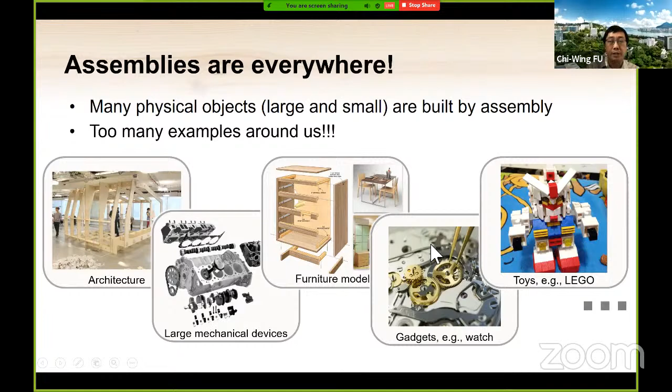So the question is, what is the general procedure to create a design? Basically, if you want to create a design of a 3D object, first of all, you have some ideas. You may need to do some sketching on paper or using a computer. Then you may want to create some virtual model to preview how it looks, and you may also use a computer to do some simulation. And then we will create a physical prototype or even the final fabrication. So that's the general design pipeline for creating objects.

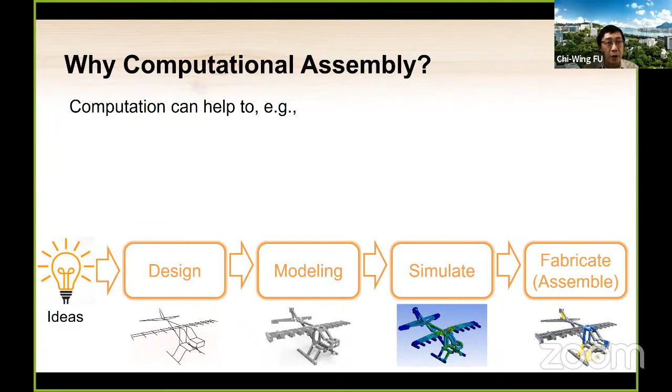But why do we want to do computational assembly, or how can computation help to create this kind of assembly in general? Basically, I can summarize how computation can help us in several ways. First of all, we can use computation to help us reduce the manual workload in the design process as well as the modeling process.

Just a simple example with Lego. If you use some Lego design tools or something like a CAD tool, we can quickly create some models with just drag and drop using the interface. And there is also no constraint on what type of brick, whether you physically have those bricks or not. You can create it virtually, for free. And the other thing is that after we have a model, we can also perform some kind of simulation. For example, we can simulate the motion, simulate the stress, and also evaluate the stability.

And more than that, we can also do assembly planning. After we have an assembly created virtually, can we use the computer to do some computation to help us design the procedure to assemble the objects, part by part? And also we can use a computational algorithm to help us generate the instructions for the assembly.

And more than that, when you have a computer, more than just those CAD tools that I have shown you, after you have created objects or some prototype, or after you perform some kind of simulation, you can also use the result of this stage to go back to the design and use some computational methods to try to optimize the design, subject to some physical constraint or fabrication constraint. I think Ziqi, in the second part of today's deep dive, will talk more about this.

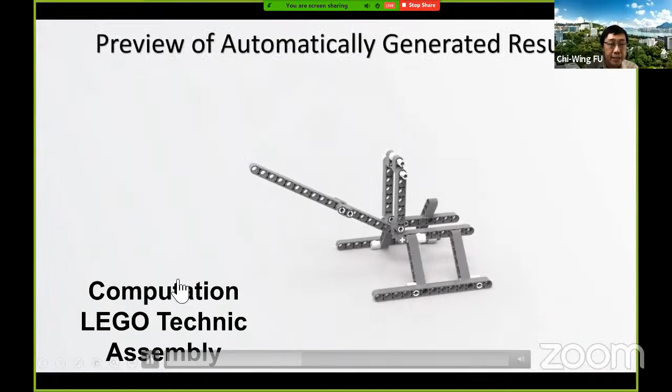Particularly my recent project on how to use a computer or algorithm to create a design. The input to our method is just some user sketch, as you can see here. Let me go back a little bit. Given a user sketch, where the user just needs to sketch in a virtual environment, a 3D world, our goal is to create an assembly, as you can see here. The assembly should be faithful to the input sketches, and we also have to consider the structural integrity, as well as aim for some simplicity in the design.

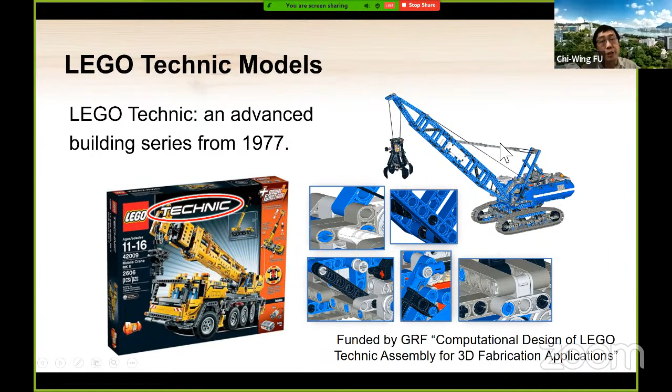So how can this be done? Before we look at how this is done, let's look at some background information about Lego Technic, which is the goal of this example project. In this project, our goal is to create a Lego Technic assembly. Lego Technic actually has quite a long history, more than 40 years already. This kind of assembly is mostly for frame structures, some mechanical structures, as you can see here.

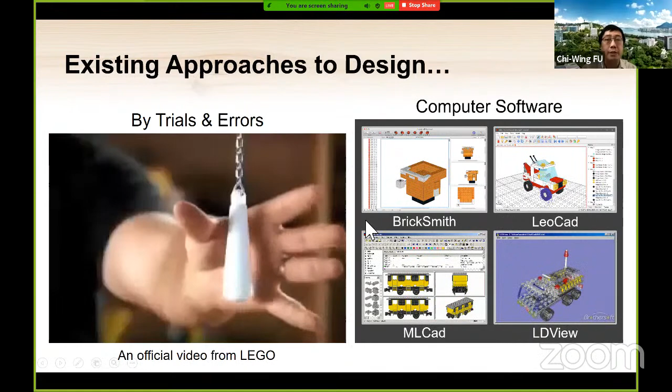For existing approaches to design this kind of assembly structure, basically there are two. One is trial and error. As you can see in this video, the designer can directly and manually construct the design, but this always involves a tedious trial and error process. How about using those CAD tools I just mentioned? Using those CAD tools, people usually create a design by means of drag and drop. You select a brick that you want to use, and then drag and drop the brick into a certain location to create the design step by step.

But as you can imagine, if you want to create something large, the problem is that you have to do lots of tedious manual work to create the design. There are some advantages of using this kind of CAD tool. For example, you can preview the result, and you can also copy and paste and drag and drop. But the problem is it's too tedious and too laborious. So the question is, is it possible to create a computer algorithm that can help us generate a design rather than manually creating every single brick ourselves?

So that's why one challenge of Lego Technic assembly, or computational assembly at large, is that we have to consider the parts as well as their connections. Okay, so this is a typical challenge for computational assembly.

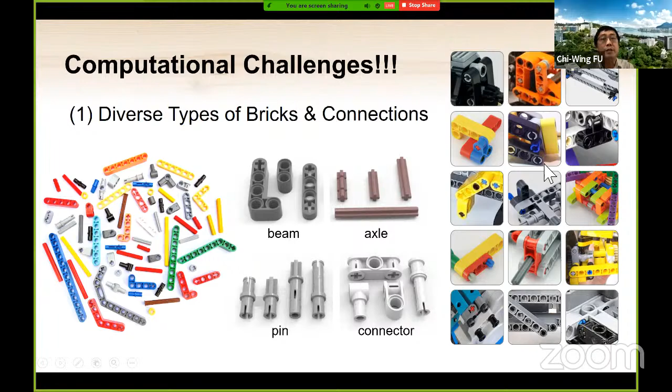Because you can imagine, if we just simply lay out all the bricks or all the parts in the three-dimensional domain, although they appear virtually to be connected, if you really build them in the physical world, they may not be connected. So that's why when you are trying to generate the assembly, you have to consider the connections and whether the whole structure is coherently connected. So this is also an issue.

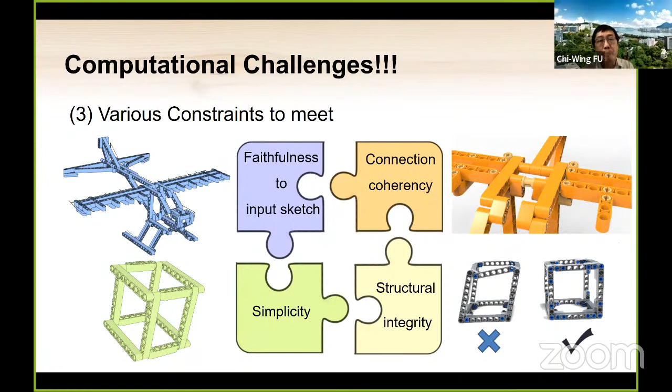So the goal in this project is that, given some user sketches, optionally with some kinds of motion annotation, and also given a database of Lego Technic bricks, our goal is to be able to directly generate a structure that is faithful to the input, coherently connected, simple, symmetric, and also with motion. So the result has to respect these kinds of constraints and objectives. So the question is, how can we design the algorithm to do it?

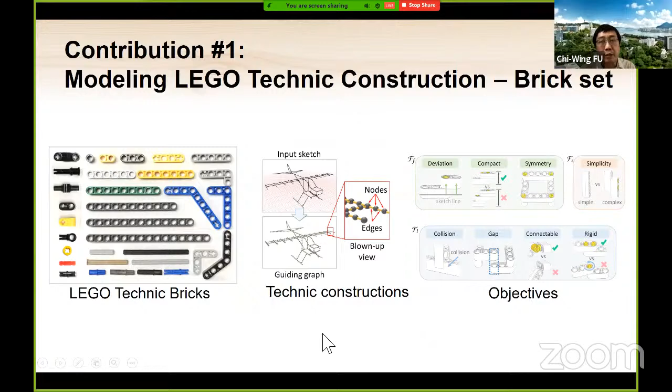Here I try to give a very brief overview of our algorithm rather than going into details. If you want to know the details, you can look at the research paper, which has been published in SIGGRAPH Asia 2019 already. First of all, we have successfully modeled the Lego Technic bricks, as you can see here. We modeled the bricks mathematically, as well as the Lego Technic construction together with some objectives.

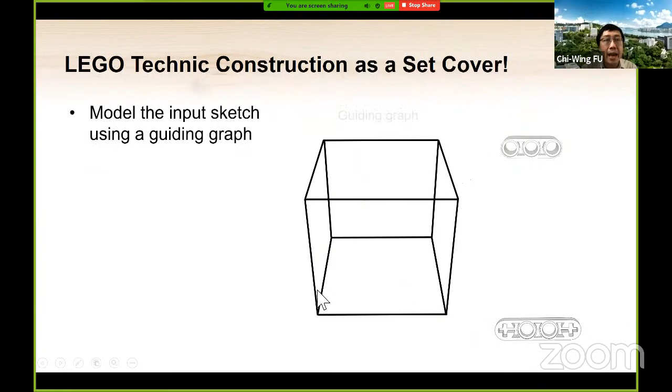This is the brick set that we have considered, and this is the connection mechanism that we consider between every possible pair of bricks. Basically we use a graph model, some data structure, to model it. Okay, that may be too detailed. And in order to ensure the input sketch can cover the design, we also convert the input sketch into a graph structure.

And after that, you can imagine this is something we call a set cover problem in computer science, which means in case we have some bricks, this is a set cover problem because if we can arrange a set of bricks in this domain to cover every single node and every single edge in this graph, then essentially we can cover the original structure. So that's why we can model an assembly problem as a set cover problem.

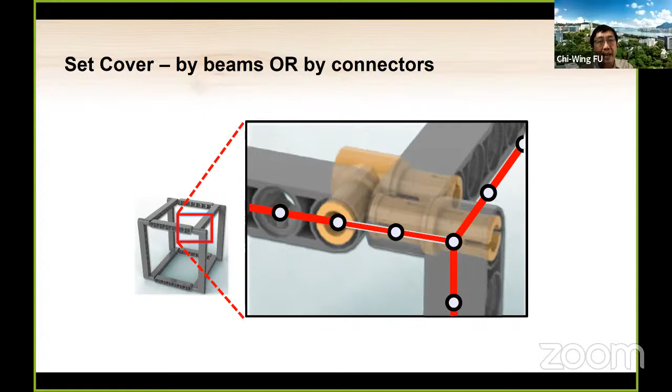But more than that, just cover is not enough. As I said, you have to make sure we have sufficient connectors, which are collision free and without any self collision, and also they are physically connected in order to connect every single brick into a coherent structure.

Eventually we also model some mathematical formulas. I will skip the details: try to avoid a deviation from the input sketch, try to make sure the generated result is symmetric and also compact, as well as simple, gap free, and also collision free, and so on and so forth. So these are the equations. I will skip all the details.

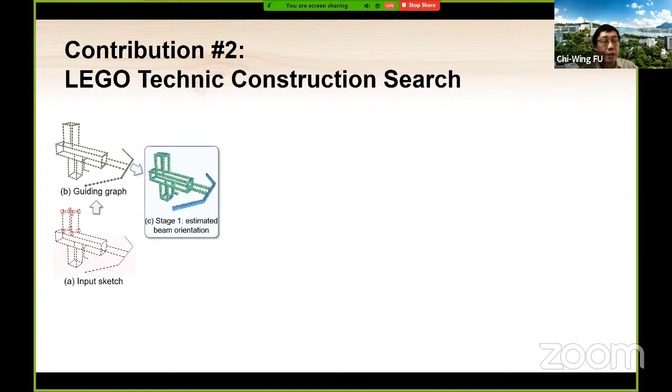And finally, we also design a two-stage algorithm to try to generate the Lego Technic assembly. After we have the preparation work that I just mentioned, in the first stage, basically we will try to generate the beam orientation, because the beam is an essential part when we try to model Lego Technic assembly. So the first stage is we try to build a simulated annealing framework to find an optimal, at least locally optimal, beam orientation over the entire structure.

In such a way that we can place beams in the whole 3D object domain in a more coherent way. And then in the second stage we try to create another simulated annealing framework, in which we design the layout modification operator. Actually, in this project, we have tried many different ways to model the operation to modify the designs, and also different kinds of frameworks to solve the problem, given the objective function I have just showed you.

We also did many different kinds of experiments to change the objective function. And actually, it's quite tedious work. Eventually, we came up with the equation and also the operation that I'm going to briefly talk about. After the simulation we generate the design. We also support stability analysis, assembly instructions, and also physical assembly at the end. So this is the overall pipeline.

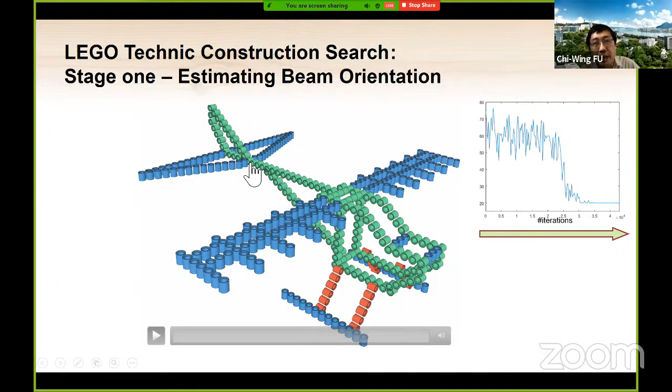So in the first stage, basically, we try to arrange the beams as you can see here, especially the beam orientation. After we arrange the beam orientation, as you can see in this small video, this is the first step in our algorithm. Let me show you. Basically, it tries to arrange the orientation in such a way that the neighboring beams can be more coherently connected, visibly in the 3D space.

And then in the second stage, we start with a random layout and then gradually modify it, as you can see in this small video, using the operator we designed in the simulated annealing framework. Eventually it will optimize the objective function I have just showed you, and then create such a result. This is the operation. I think I will skip it due to time.

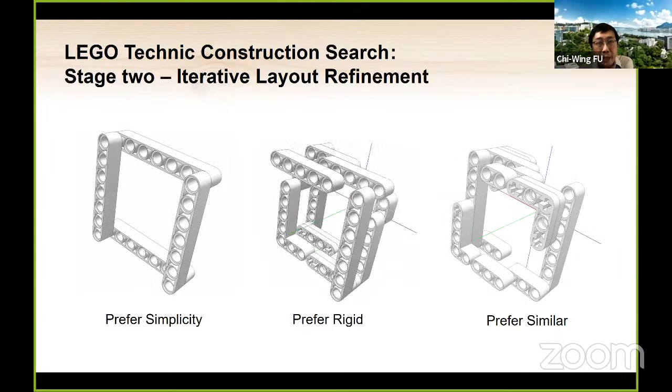And here are more results I just want to share with you, creating different kinds of assemblies. Simple examples. Basically, the whole procedure is guided by the objective function I showed you earlier. I think I have to skip.

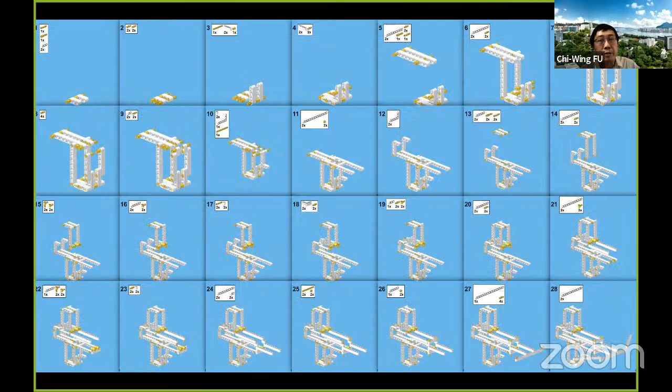And at the end, our system also supports balancing evaluation and stress analysis, as well as assemblability, to ensure that in case we follow certain steps to construct the model, we can ensure assemblability without self-collision during the assembly process. And finally, some results. This is a generated result, produced from this sketch, and this is another result.

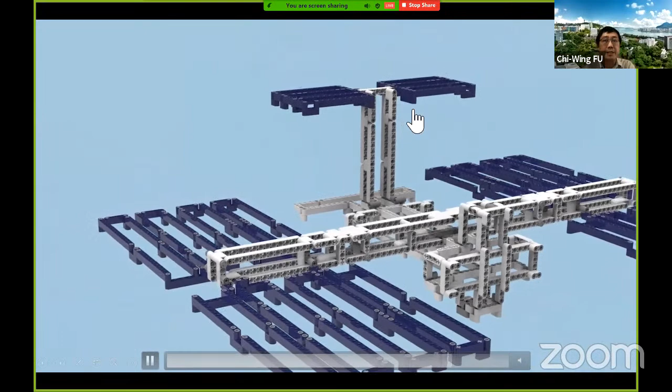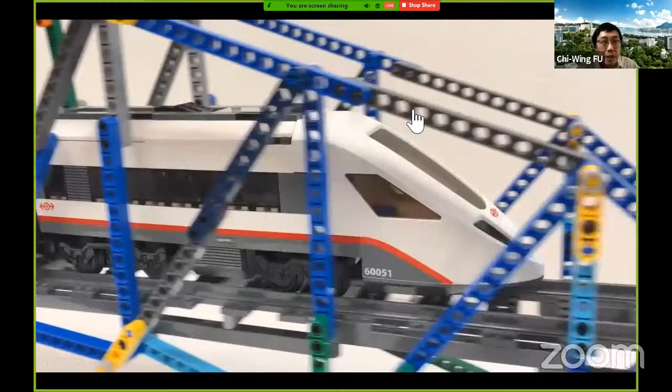Okay, due to time, I think I will just quickly go through the rest. So these are the physical assemblies designed by the system that I just showed you. You can see the time is actually quite fast compared to human design. If you want to design those things, just input the sketch and then the system generates the brick arrangement. It only takes a few seconds for simple models or just a few minutes for more complex models,

as you can see here. Okay, and we also did lots of experiments, but due to time, I will skip all these. For details, you can read the research paper. So after I talk about this one example, at the end of my part, I want to introduce to you some research topics currently in computational assembly.

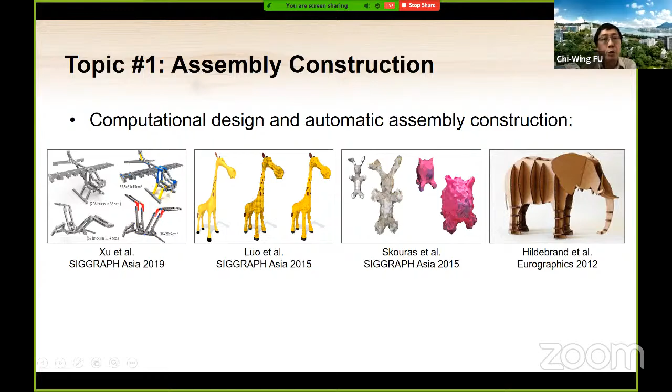I think the first topic is something I just talked about: to automatically generate or construct an assembly. For example, Lego Technic, general or regular Lego bricks, some interlocking elements, paper elements, and also some laser cut parts. So this is one topic. And the other topic, which is also quite popular, is joint construction and also 3D interlocking, as you can see here.

Because when you have an assembly, one important problem is once you have the individual parts, how can you connect the parts coherently together as well as stably together? So that's why there are several works that try to explore the problem of joint creation as well as interlocking. Okay, and next is reconfigurability.

When you construct an assembly, is it possible to construct it in such a way that the assembly can be reconfigured, which means that we can disassemble the assembly or modify it to make it into another form for practical usage? So there are some works going on in this area. And also there are some works on computational assembly that try to create and design assemblies that can deliver certain target motions, as you can see here in this slide.

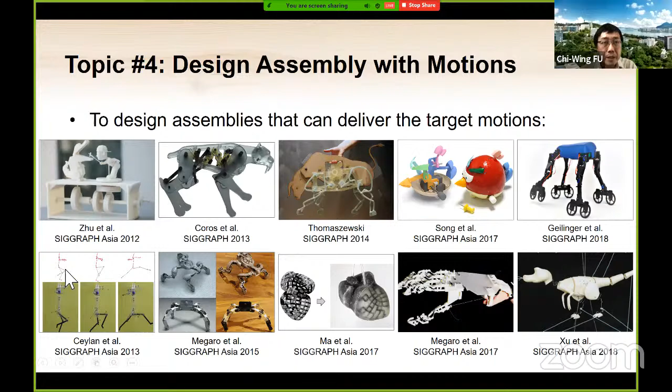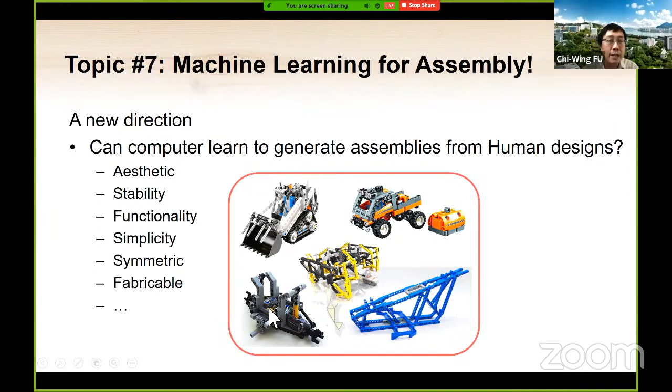Finally, I also want to share a new direction that I'm working on currently, which is trying to use machine learning to learn to create assembly. The question in this topic is, can we create computer algorithms or AI neural networks to help us generate assemblies based on some human designs? This is actually a very challenging topic. To start, we created one work last year with Ziqi Wang.

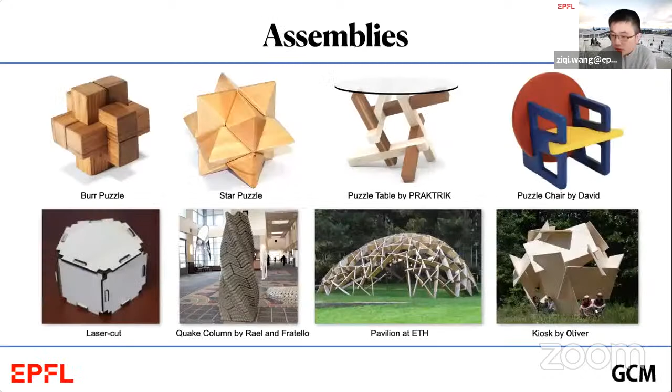In the classical design framework, users tune some design parameters to generate assembly geometry, which is then evaluated according to some user-defined objectives. The parameter space can be either discrete numbers to create this interlocking cube, or it can be real numbers to create this topological interlocking half sphere. More design iterations are needed if the result does not meet the user's requirements.

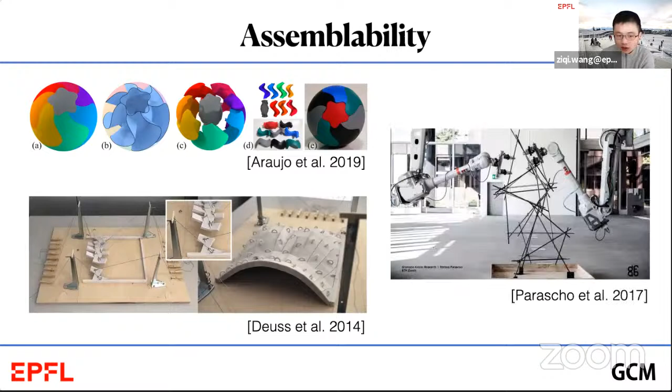So what are these objectives? First, let's look at some previous work about assemblability. The upper one is about avoiding part deadlocking for assembly. The lower one is about minimizing the scaffold usage during the assembly process. The right one is about resolving the collision between assembly structure and robotic arms.

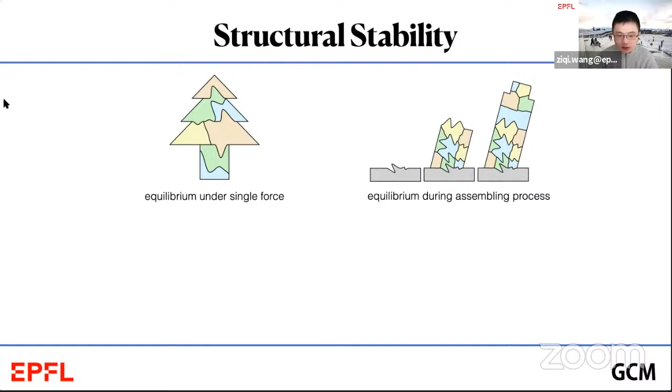The first and the most classical problem is to check whether a given assembly can stand on the ground under gravity. The second type of stability tells, during the assembly process, the partial assembly at each assembling stage should be in equilibrium. The third stability is about assembly under multiple loading conditions.

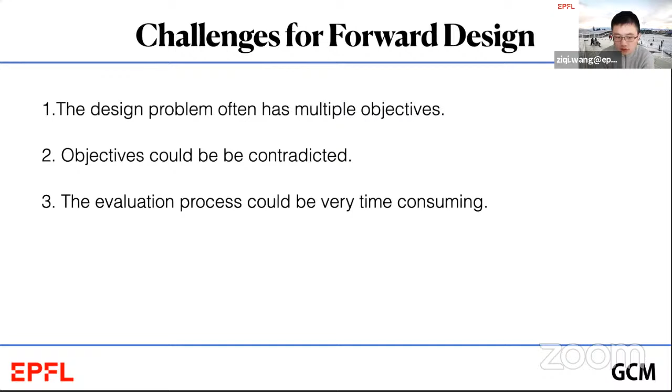The forward design is hard for humans. Usually the design problem has multiple objectives and some of them even contradict, like assemblability and stability. Higher stability means the joint should be tight enough, but good assemblability means parts should be easy to insert into the structure. The joint should not be so tight. Lastly, some evaluation processes, like calculating stress by FEM, may take several minutes or even hours, which significantly slows down the design iteration.

That is why we would like to have a fully automatic design tool. Once users select some specific design goals, the tool can produce a set of feasible solutions. This process is often called inverse design.

In today's presentation, I'm going to talk about a general framework for the inverse design problem. Particularly, I want to focus on how to design structure-stable assemblies. Then I will discuss how to adopt the general framework into two real applications, the topological interlocking and the global interlocking assemblies. In the end, I will discuss some future works.

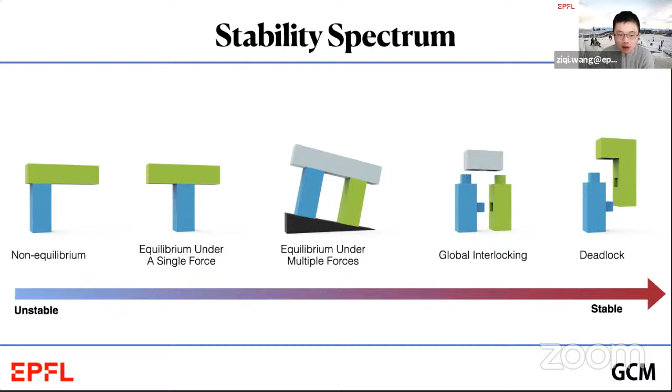So our goal is to optimize assemblies' part geometry to achieve different types of stability. Here is a spectrum of the stability that is commonly used for assembly design. We order them according to how much external force the assembly can withstand. Only the assemblies inside the practical region are usable for real applications.

In this section, we focus on the assembly which is in equilibrium under a single force, mostly gravity. For example, how to make this two-part assembly in equilibrium under gravity. Before introducing our method, we need to make 3 assumptions. First, all parts must be rigid. Second, friction is ignored. Lastly, the bottom blue part is fixed.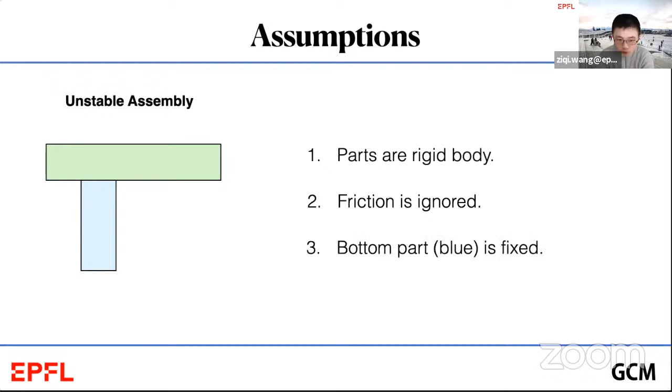Commonly, there are 2 approaches to stabilize the assemblies. One way is to change the position of the part's center of gravity, such that its projection stays inside the contact region. Another way is to modify the contact shape to restrict the part's movement.

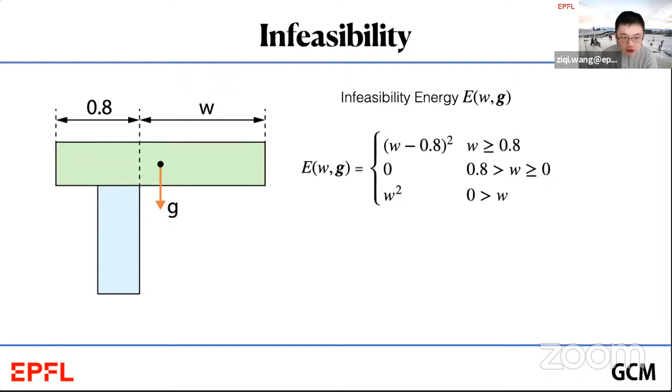Here, we need to introduce a very important concept, the infeasibility energy, which measures how far an unstable assembly is away from being stable. When the energy function E is 0, the assembly is stable. When E is larger than 0, the assembly is not stable. For this two-part example, its infeasibility energy is a piecewise quadratic function with respect to W. The infeasibility energy is often used for constructing nonlinear optimization to design stable assemblies.

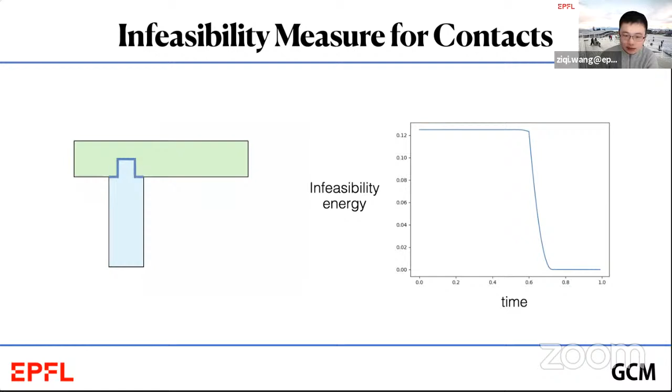The core is to measure the green part's collision-free movement. The movement we used for stability test is the infinitesimal rigid motion, like the right. It's composed of a rotational part, which is rotation around the point, plus the translational part, which is just a 2D translation. Ideally, in 2D assembly, the motion should be infinitesimal. Here, the part moves in a short period of time just for visualization purposes.

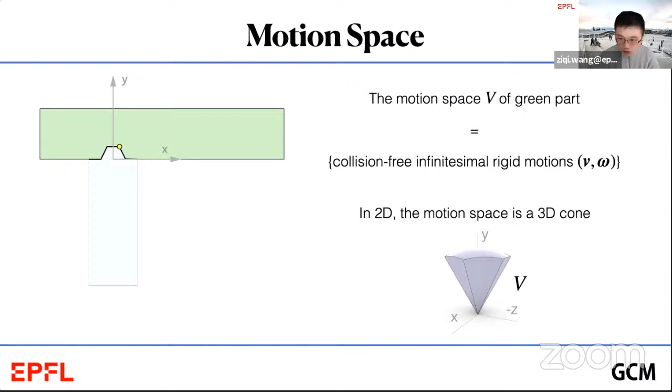The motion space of the green part is equal to all collision-free infinitesimal motions that can take the green part out from the blue part. In 2D, since the green part has 3 degrees of freedom, 1 rotation and 2 translation, its motion space is a 3D cone. So how to compute this motion space is what we are going to talk about.

The part's motion is restricted by the non-collision constraint of each pair of contact point and contact normal. No collision means that the dot product between v_r, which is the instant velocity at the contact point, and the contact normal should be non-negative. The velocity at the contact point, colored in yellow, is computed by the sum of the rotational component, which is omega cross product with r, plus the translational component, just v.

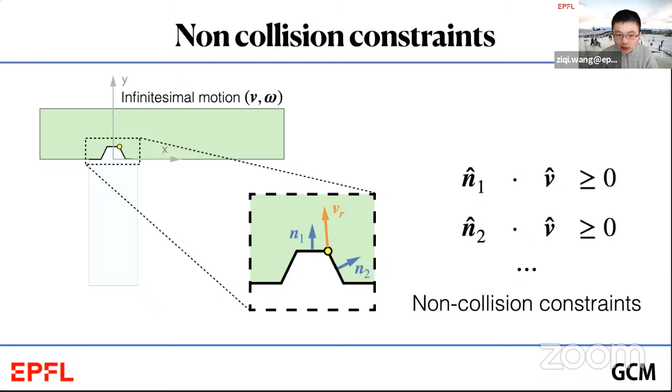Substituted into the constraint, we can rearrange the equation by putting n and r on one side and v and omega on the other side. We call the left side n hat, which is the generalized normal, and the right side v hat, which is the generalized velocity. So each pair of contact point and normal corresponds to a linear non-collision constraint. Suppose N is the set of all generalized normals; then the motion space is the dual cone of the generalized normal set. And some convexity theorem tells us that V must be a convex cone.

Now we can draw the motion space for each contact shape. We can see the volume of the cone decreases from planar joint to tenon joint, tenon mortise joint, and in the end, the motion cone just becomes the plus y vector.

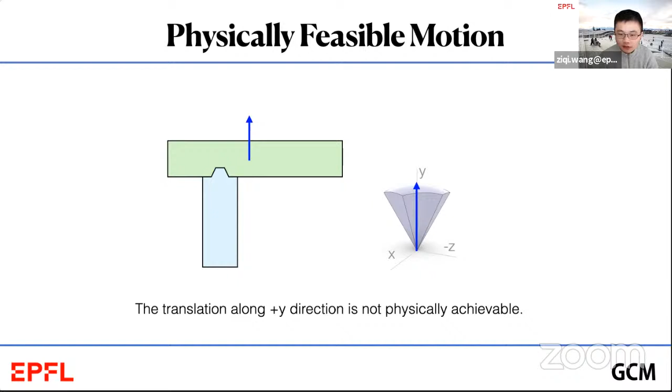However, the motion in the motion space is not always physically achievable. Translating the green part along the plus y direction is collision-free, but won't happen in a gravity field. The reason is that the instant velocity at the green part's center of gravity should decrease its gravity potential. The dot product between v_c and g should be non-negative.

Substituting v_c with omega cross product with r_c, which is the position of the center of gravity, plus v, we have this equation, and we can do the same rewriting, putting g and r_c on one side and v and omega on the other side. Now we can use similar notation to define the generalized gravity.

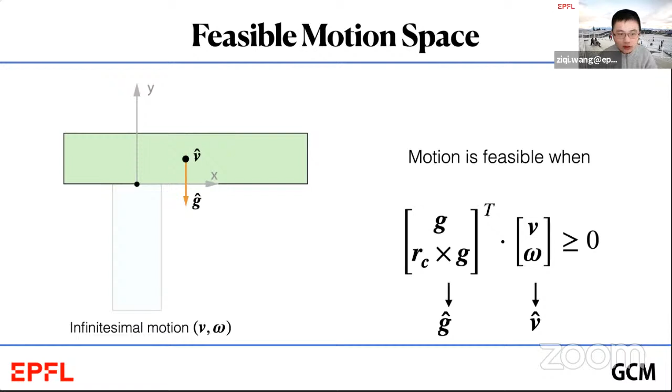So an assembly is not stable if its motion can satisfy both the gravity constraint and the non-collision constraint. Geometrically, the gravity constraint is defined by a half space, and the non-collision constraint is defined by a cone. The intersection volume between them actually measures the structure infeasibility, so the larger the volume, the less stable, or farther away from being stable. However, this measurement is not easy to compute and hard to extend to general cases.

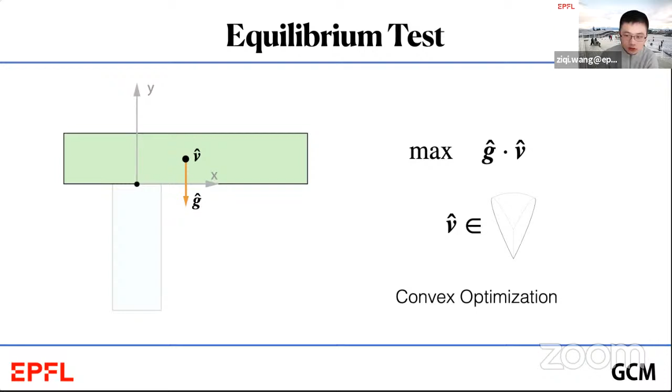An efficient way is to set up this convex optimization as an equilibrium test, which outputs 0 when the given assembly is stable. Here, the optimization encourages the green part to have a velocity that decreases its gravity potential while avoiding collision. However, this test is unbounded for unstable assemblies. Any collision-free velocity v in the motion space is also collision-free if you scale it, so the objective function will explode. Thus, we need to add a regularization term, the negative squared norm of the generalized velocity, to the objective function to avoid this infinity problem.

This formulation turns out to be a good measurement, which can be used for shape optimization. The measurement can be extended to multi-part assembly easily. The collision constraints now are set for each pair of adjacent parts. It's no longer just between P1 and P2, but also P2 and P3. The objective function is almost the same, where we just stack all parts' general velocity and general gravity to get the hat V and hat G.

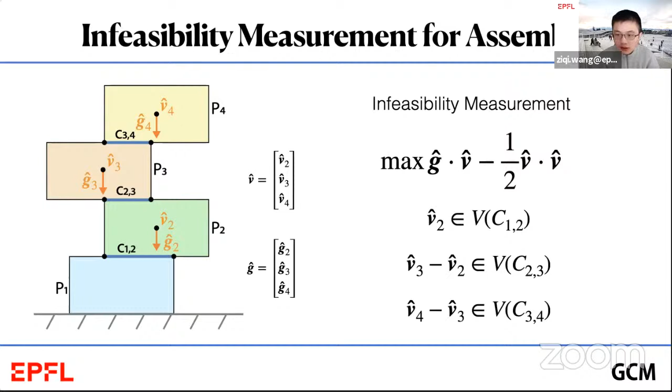This measurement is a quadratic programming with linear inequality constraint A. Here, the matrix A is computed by contact geometry, and hat G is computed by part geometry. Recent papers have provided many ways to compute the first derivative of this infeasibility energy using sensitivity analysis.

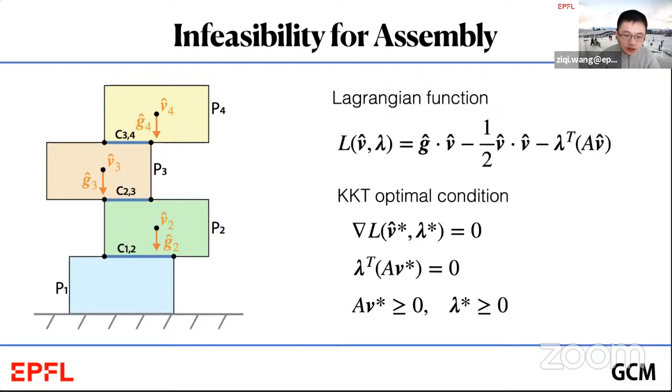Specifically, we can use the fact that any optimal solution for a QP problem should satisfy the KKT conditions, which is composed of optimality for the Lagrangian function, the slackness condition, the original inequality constraints, and the non-negative constraint for dual variables. Then we can do a classic sensitivity analysis for this KKT system to compute the derivatives.

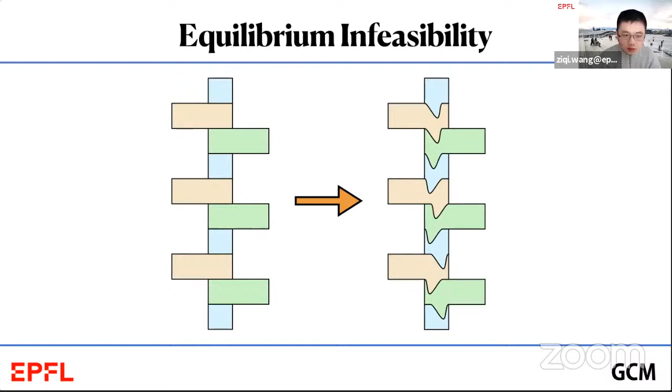Having the derivatives, we can use some off-the-shelf method to minimize infeasibility energy with respect to parts and contact geometry. The method finds a feasible solution when the final infeasibility energy becomes 0. This is an example. We modify the contact shape such that the left unstable stacking puzzles become stable. Another fabricated Christmas tree model, which originally is not stable and is stable after optimization.

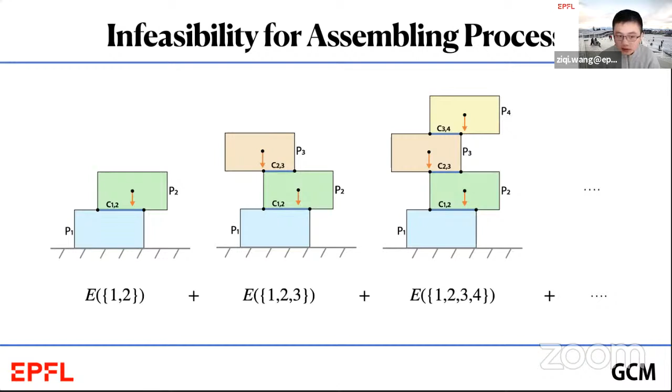By summing up all infeasibility energy at every step of the assembly process, we can define a new infeasibility energy such that the optimized assembly is stable at every step of its assembling process. Here is an example of Leaning Tower, which is stable at every step of its assembly.

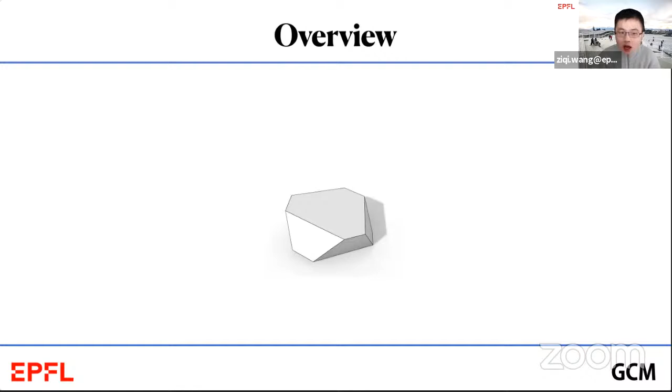Okay, the general framework is done. We move to our first application about designing topological interlocking assemblies. In the first application, we are going to investigate how to use convex rigid blocks, which can be simply cut from stone, to assemble a 3D masonry structure that is structurally stable without using any mortar or glue.

Using convex blocks to build a structurally stable assembly is a very interesting yet challenging research problem. Let's start with this pavement with hexagonal blocks. Since we can easily take each block out, this pavement is not geometrically stable. Thus, we are interested in finding another type of block and properly arranging them such that each block is immobilized by its neighbors.

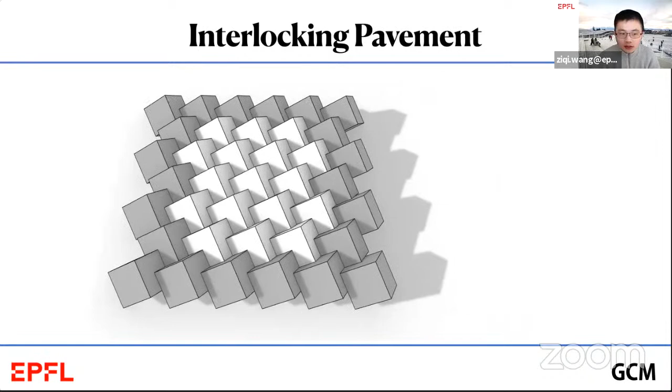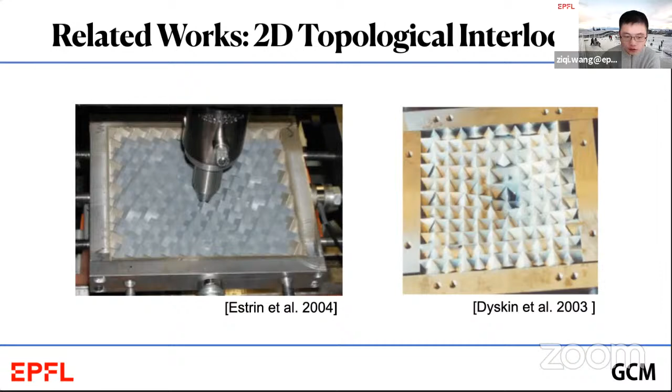In mechanical engineering, researchers experimentally test the structural stability of this structure. Surprisingly, these cubes are not only in equilibrium under gravity, but also can withhold other types of external forces, like the center compression force shown in the left image. In architecture, the famous Abeille wall shown on the right also uses a similar methodology in which the cubes are replaced with truncated tetrahedra.

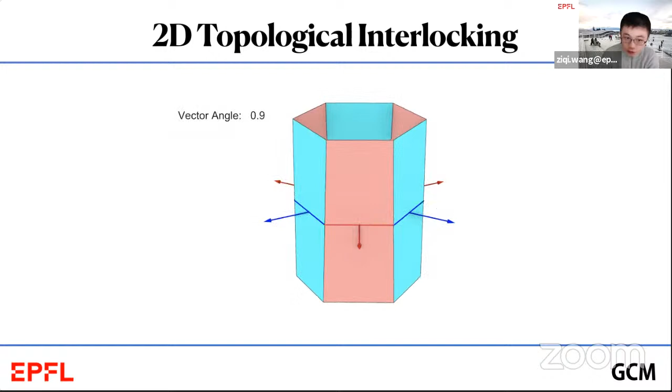Actually, there is a connection between topological interlocking and the pavement with hexagonal blocks. Starting from this hexagonal block, let's rotate the normals of its 6 lateral faces. Here, I remove the top and bottom faces of the block in order to see the change of the 6 lateral faces. Then the new block is the intersection of the 6 tilted faces.

We still have to truncate the block at top and bottom to make it form a closed shape. During the rotation, the red faces are pointing downward while the blue faces are pointing upward. The vector angle on the top left shows how much each face rotated.

Here is an animation that shows how the pavement transforms to the topological interlocking cubes. The rotation angle of the faces is shown on the top left. So can we extend this process into 3D?

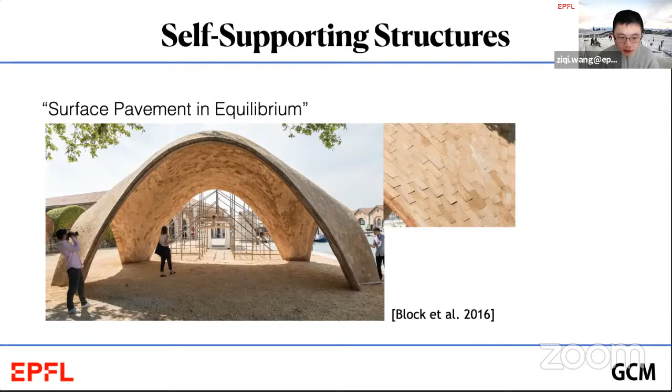To answer this question, we have to ask ourselves, what is the 3D version of the 2D pavement? I would say it is the self-supporting structure with convex blocks, which can stand under gravity without using any mortar or glue. Starting from a self-supporting structure, we can rotate the faces of each block by the same rotational angle to generate a series of topological interlocking structures, just like the 2D case.

To explore more design possibilities, the rotational angles of faces are not the same in the later shape optimization. Here is just for visualization. We find that these topological interlocking assemblies have very good performance in multiple loading conditions, like this igloo, which can tilt by around 30 degrees along different directions.

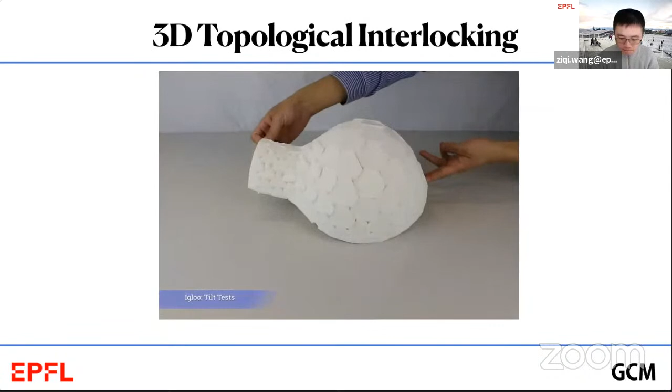Thus, we want to investigate the third type of stability in our spectrum, where the assembly is stable under multiple external forces. Here, the stability in multi-loading cases is defined by the tilting test. We tilt the ground to see how large the tilting angle can be before the structure collapses. For different tilt directions, the maximum tilt angle could be different.

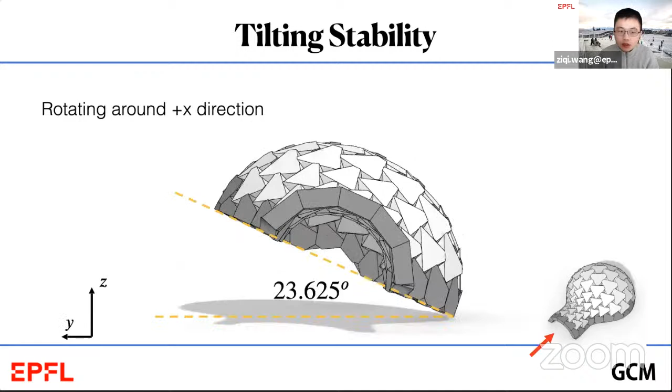For example, we rotate this igloo around the plus X direction. We got a maximum tilt angle of 23 degrees. If we tilt around the plus Y direction, we got 27 degrees, which is bigger than the plus X direction. Because tilting the ground is equivalent to tilting the gravity direction, here we use a cone to represent the tilt stability. Each vector inside this cone is a gravity direction for which this igloo is in equilibrium.

We also know that our equilibrium formulation is a linear system, so the cone must be convex. Thus, the structure stability is just the minimum of the maximum tilt angle in all tilt directions.

So let's review the forward design pipeline discussed at the beginning of my presentation. Here, the parameters are the vector angles of contact faces. We construct each block's geometry from these vector angles. The assembly geometry allows us to compute the feasible gravity cone in the end. If the evaluation does not meet the user's requirements, iterations are needed to adjust the parameters as well as the part geometries.

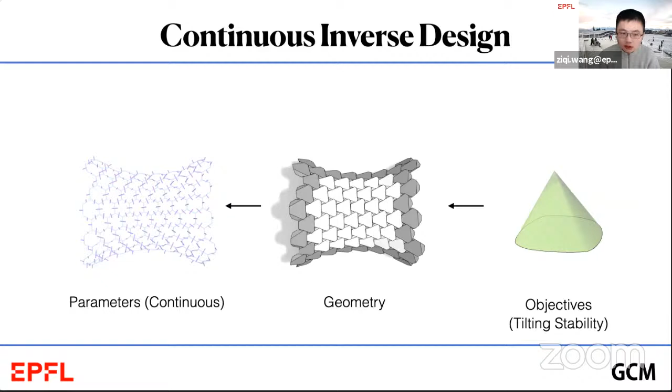However, there are hundreds and thousands of variables in this process, making it very hard for humans to find a good solution. For our inverse design algorithm, we would like to first increase the objective and use shape optimization to find the corresponding geometry. Let's explain it in detail.

To enlarge the feasible cone, we need to include the red gravity direction into the cone. We use the structural infeasibility from previous slides. The infeasible energy for the blue direction inside the cone is 0, while the infeasible energy for the red direction outside the cone is bigger than 0.

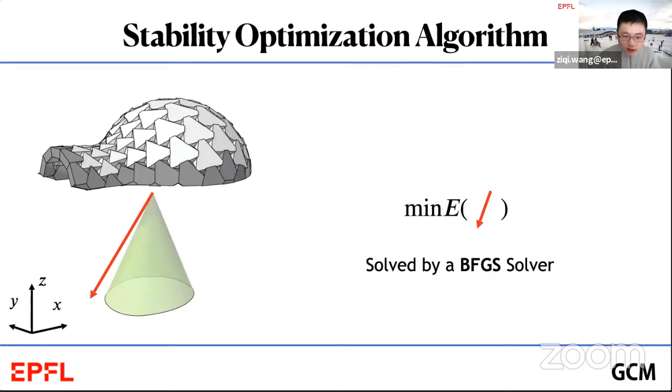From previous slides, we know we can use sensitivity analysis to compute the first derivatives of the infeasible energy. We then use the BFGS solver to solve the energy minimization problem for the red direction. But this may not increase the cone, because the cone could just shift to the left. The stability measurement, which evaluates the worst case, may not be improved.

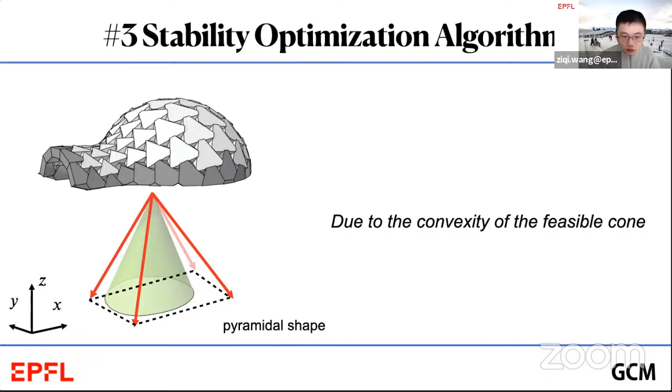To enlarge the feasible cone, we have to minimize the energy for multiple directions simultaneously. Besides, we set constraints for contact to make sure that the structure is valid after optimization. Due to the convexity of the feasible cone, once the infeasible energy drops to 0, the new cone will cover the pyramidal shape defined by the 4 directions. Thus, we increase the structure's tilting stability.

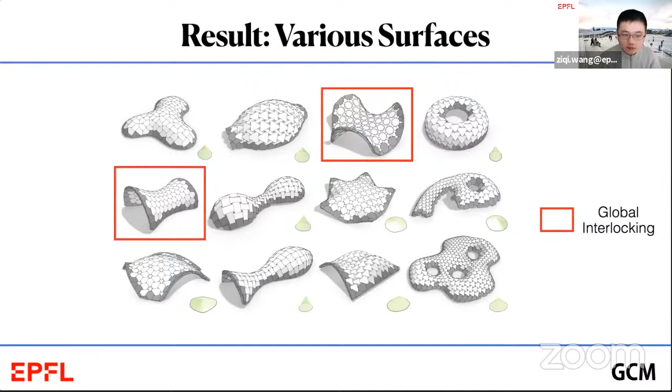Here are some results from different input surfaces. So in some special cases, the assembly can be globally interlocking. The 2 assemblies in the rectangle box are globally interlocking. Here is another global interlocking example.

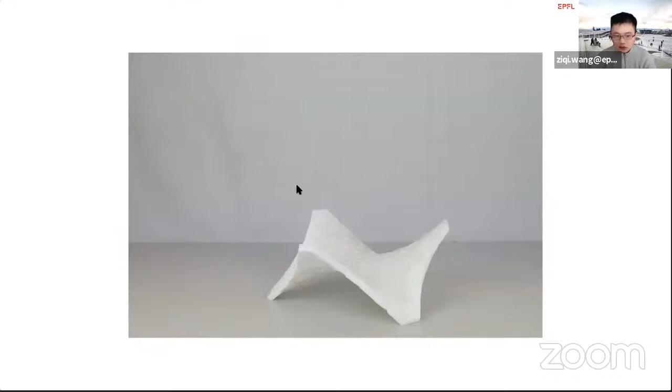Global interlocking means the assembly can withstand arbitrary force and torque, like this minimal roof example. However, designing this assembly needs a little bit of luck.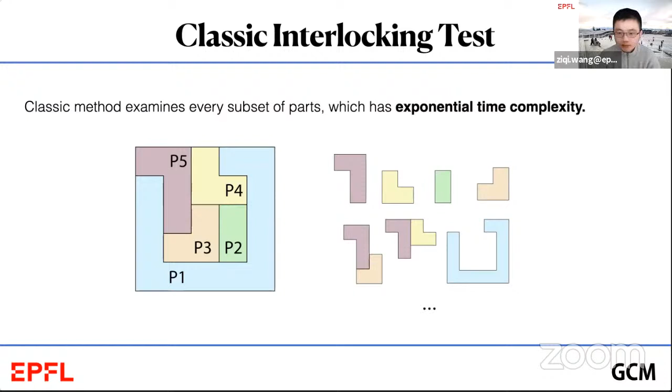Instead, we can reapply what we learned from computing the infeasibility energy in the equilibrium test. Here, the non-collision constraints tell us that the relative velocity of the adjacent parts should be constrained by its contact motion space. So for example, the relative motion between P2 and P1 should be constrained by their contact. We already know it can be written as a linear system from previous slides.

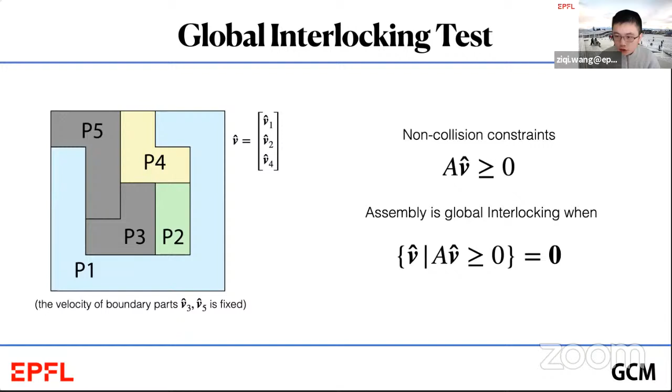Once P3 and P5 are fixed, the assembly is interlocking if this linear inequality system only has the 0 vector as its solution. No part can move in this situation. Because the constraint forces have to be 0, the assembly's infeasibility energy under arbitrary forces and torques should be 0 as well, which proves that any globally interlocking assembly can withstand arbitrary external forces and torques in theory. So the force should be within the material limit. That is why we can put global interlocking at the end of our stability spectrum.

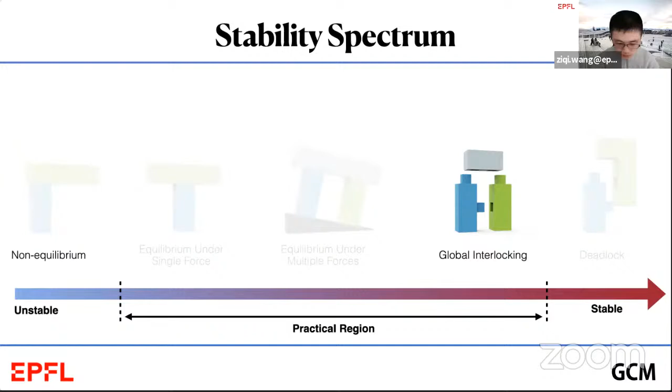To further facilitate the shape optimization for global interlocking, one possibility is to define an interlocking infeasibility. Just like what we did for equilibrium under multiple forces, we also want an energy for interlocking. We can simply sum up all infeasibility energy for all possible external forces and torques. However, this process is very, very expensive to compute. To find a good measurement, we need some simplification.

Since most of our assemblies here are composed of voxels, we can ignore the rotational component and assume the contact normals are axis aligned. Then we can get rid of the hat symbol from the generalized velocity as well as the generalized normal. So every variable here only has 2 coordinates instead of 3. Since the normals are axis aligned, we can just replace them with +x and +y. The N3 is deleted because it is basically in the same direction as N1.

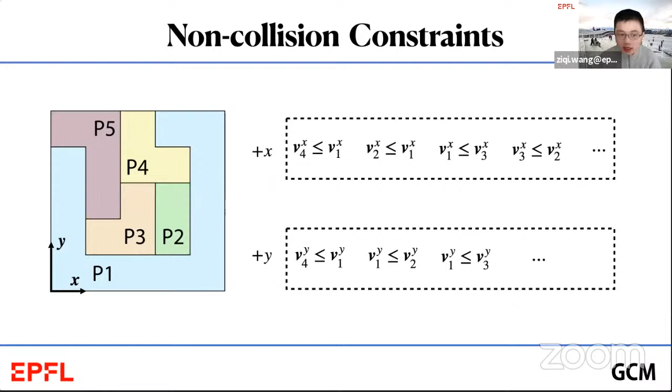So for the contact between P1 and P4, we have 2 separate constraints, one for the x coordinates and one for the y coordinates between P4 and P1. What that means is, for example, in the x direction, P1 must move faster than P4 to avoid collisions. We can add all other constraints and cluster them in x and y sets. The inequalities can be visualized by 2 directional blocking graphs.

An edge in this graph, colored in red, means P1 is moving faster than P2 in the x direction. If a graph has a cycle inside, that means P1 is faster than P2, P2 is faster than P3, and P3 is faster than P1 in the x direction, which turns out to mean that P1, P2, P3 have the same velocity in the x direction. Also, another cycle in the +x direction means that all part velocities should be the same in the x direction.

That basically means if a voxelized puzzle is globally interlocking, its directional blocking graph should be strongly connected except for the key. The key is special because it has to be taken out to avoid deadlocking. The forward design pipeline needs the user to guess the numbers for an n by n matrix, which determines the part geometry, to make the assembly directional blocking graph strongly connected. Here, for example, the graphs are not strongly connected, especially in the +y direction. So we need more design iterations.

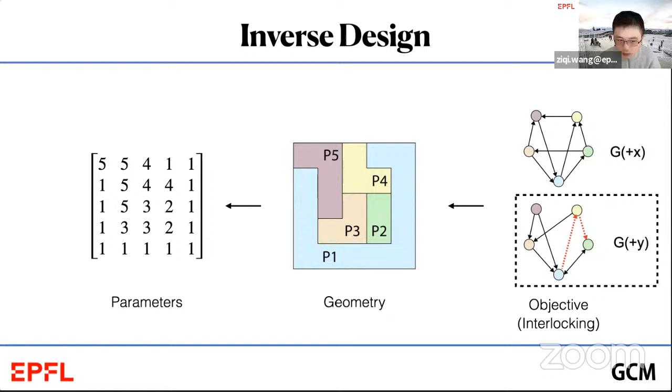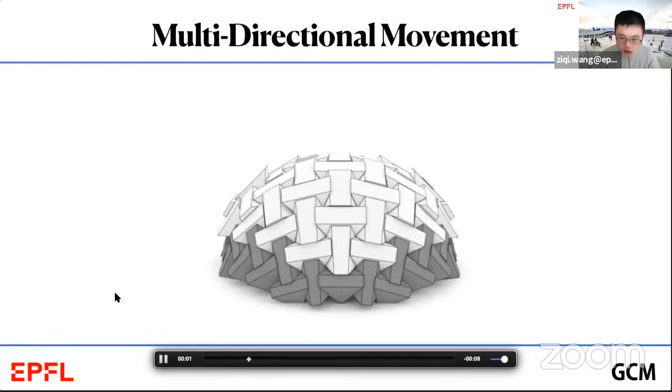The strongly connected requirement for an interlocking assembly is just a necessary condition, but not a sufficient condition for these particular assemblies. But still, the strongly connected requirement is a good way to eliminate non-feasible solutions in the early design stage. So it's still useful for quickly deleting infeasible solutions.

Of course, we can set up linear programming to check whether a structure is interlocking or not. Though this test is generally not useful for shape optimization, once we design an assembly, we can use it to verify our solutions.

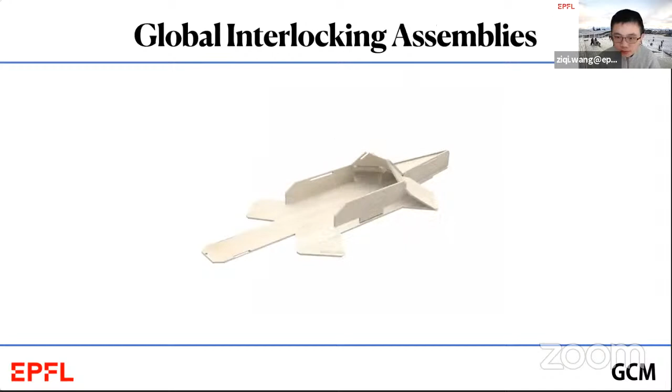Here is a larger example, whose parts are 2D plates. Here is a flower example. We use the 3D voxel puzzle to be its joints.

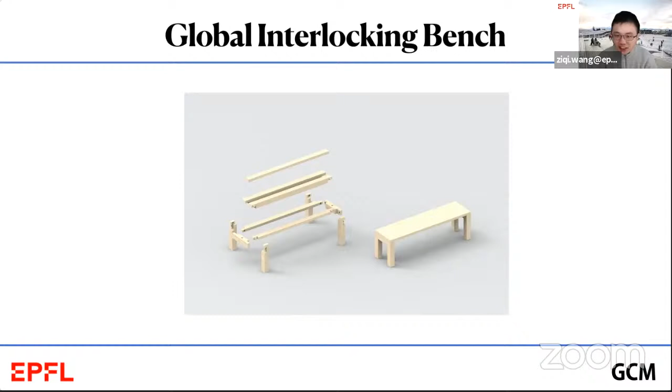And my colleague and I also tried to design a real bench by using our algorithm to beat IKEA furniture. Our bench design is elegant and environmentally friendly without using any glue and nails.

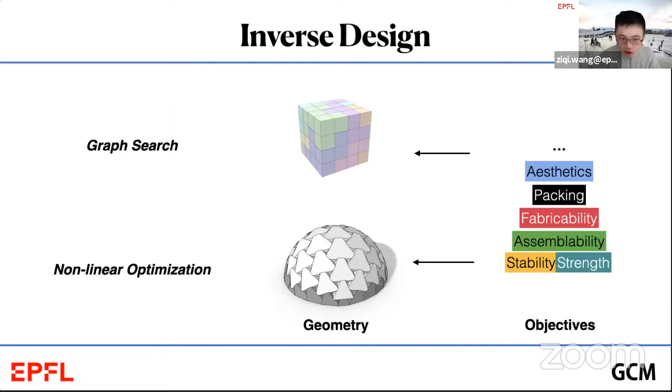Okay, so that's mostly done for the technical part. I will conclude my talk by saying several future works. So in conclusion, we propose the stability spectrum in this talk and explain how to formulate the test for each type of stability. Then, based on the user's defined objectives, either we do a graph search to solve this combinatorial problem to create interlocking cubes with discrete parameters, or we do nonlinear continuous optimization to find the topological interlocking assemblies with good tilting stability.

So I assume all parts are rigid, but in the future, I would like to drop the rigid body assumption and consider elastic bodies that are in contact. Contact FEM actually has been widely used in mechanical engineering, also in civil engineering. However, the inverse design, due to its difficulty, is still an open problem. The inverse design here is about how to reduce the stress concentration by changing the contact shape of an assembly.

The challenge is that simulating part deformation with contacts is already very time consuming. If it's a small deformation, you usually solve a larger QP problem. Here, for our infeasibility test, each element is a block, and each block only has one node. But for the FEM simulation, the block has to have multiple tetrahedrons to do the simulation. So it's a very slow QP problem. And for a large deformation, you have to solve a series of time-dependent QP problems, which is even more time inefficient. So doing an inverse design, you need to do a sensitivity analysis that will be even more inefficient.

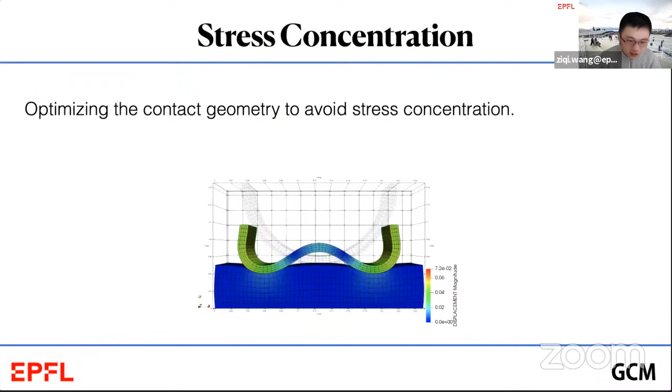Another potential topic is about using contact as a way to increase structure stiffness, or increase the structure stiffness non-continuously. So here is a project done by my colleague, which is published in Nature, where they design a unit cell that can be pre-programmed to have different stiffness. The main difference between the same unit cell in different stiffness states is that the upper one has self-collision earlier than the lower one. So they intentionally move some of its parts to create this self-collision to increase the structure stability.

So could we design some kind of microstructure with self-collisions that have more diverse stiffness behavior? That would also be a very interesting topic. And we can combine these microstructures or building blocks to have more interesting assemblies in the end, which will also be very interesting.

So the third potential project is to consider using robotic arms to assemble structures, like this timber assembly project, which is done by our colleagues at ETH. So the challenge for this project is to avoid collisions between the robotic arms and the structure itself. Often designers design the structure first, and then they find a feasible robotic assembly sequence, and also the robotic assembly motions to assemble the structure. So it's like a linear pipeline because there are so many constraints.

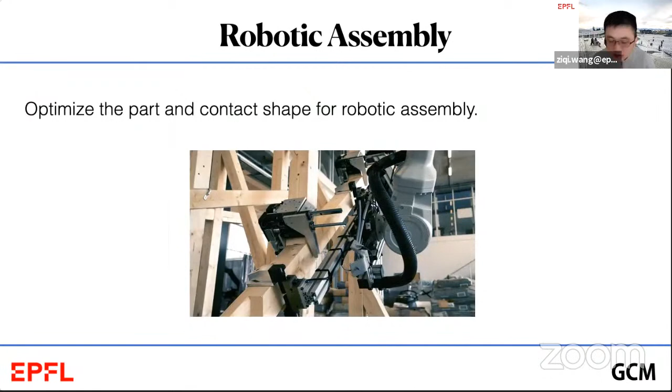Another thing I want to explain here is why they assemble these beams using this heavy machine to push the joint in. It is because of tolerance. You have so much tolerance, or so many inaccuracies, in real applications that if you don't align them carefully, the beam just cannot go in. The tolerance or inaccuracy can come from the fabrication techniques, the milling machine, or the material itself.

The wood is a live material, so it will expand and shrink if the humidity changes. Also, the material is elastic, so it will bend under gravity, especially at these large scales. And also, you have some alignment problems, and all combined these problems will make the tolerance issue very, very important in the assembly design. So how to deal with these tolerance issues, or how to intentionally design to reduce the tolerance issues, will also be a very interesting project.

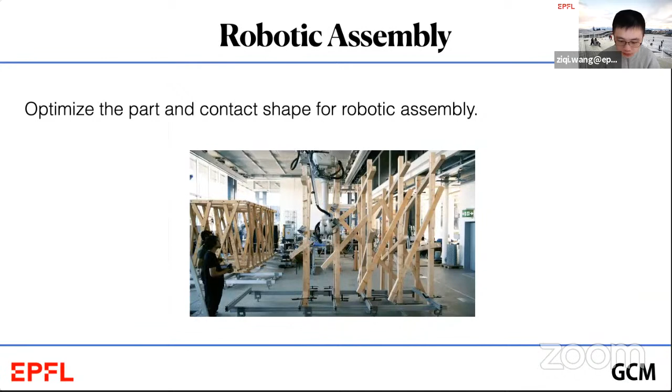So can we minimize the total amount of scaffolding by adding temporary joints between parts to make the intermediate stage stable, or intentionally use friction to make them stable in the intermediate stage? In the end, you don't need them because the structure is stable. Just using them in the intermediate stage will be a very interesting topic. Also, can we find a good assembly sequence that doesn't need so much scaffolding? That will also be a very interesting project to try in the future.